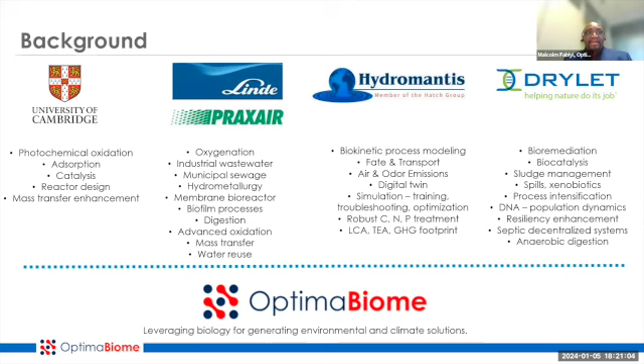And for the last year, I've been running my own startup called OptimaBiome, and what we do in OptimaBiome is basically just leverage biology for bringing environmental and climate solutions. So in all of this time, this is just a selection of some of the types of processes that I've essentially worked with. So a lot of oxidative type processes, a lot of filtration, adsorption type systems, done a lot with oxygen, enhancing mass transfer, trying to improve mass transfer processes.

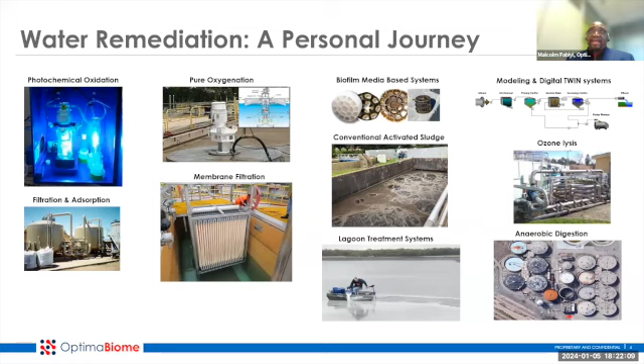We've worked with membrane filtration, with different types of biofilm systems, just to enhance how you intensify biological processes. Conventional aeration, work with ozone, a lot of work with digestion. And as I indicated, one thing that has tied all these different processes together is just the modeling aspects. I think we've come a really long way, and I'll talk more about this in future slides, where we now have a deeper, keener understanding of what is going on in these treatment processes.

So if I jump straight into sewage treatment, the traditional approach we have to treating sewage is almost exactly about 110 years old now. It was developed by 2 gentlemen, Ardern and Lockett, based out of the UK in 1914. And the reality is the process has changed very little from what they did. The major changes that have happened have been around what you do in secondary treatment. So for almost 60 years, from about 1914 till about 1974, at least in the US, the exclusive focus of wastewater treatment was just removing COD.

There are 3 major challenges we have in a wastewater system. We have carbon, we have nitrogen, we have phosphorus. And we spent the first 60, 70 years just focused on removing carbon. If all you want to do is remove carbon, all we need to do very simply is capture it; about 50% of the carbon coming into a wastewater plant is in the form of solids, mostly fecal waste. So if we have grit removal systems that remove sand, if we have primary clarifiers, this is sufficient to remove about 50, 60% of your organic material.

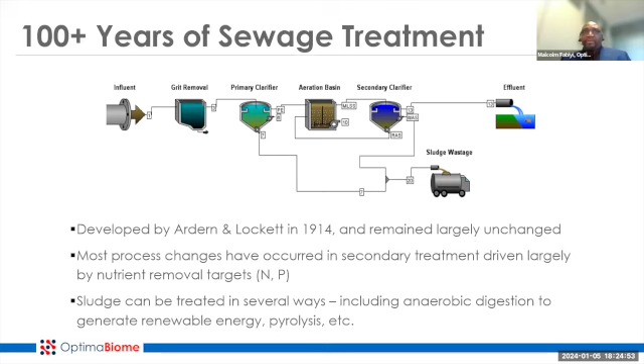What has changed in the last decade or so has been that in the past, we were all prepared to take the sludge and take it to a landfill. Now there's a recognition that locked up in that sludge is organic material, is energy, and why waste energy? Why take it to a landfill and have fugitive methane emissions, leachate result from that when you can actually tap into that energy source?

The other thing that we've learned, and I'm grateful to have been part of this development in the last decade or so, has been that we now have a keener understanding of all the complex elements that go into the wastewater treatment process. As I indicated, I was fortunate to work with Hydromantis, leading their activities in the US. The CEO of Hydromantis is a gentleman who is actually now visiting family in India called Dr. Rajiv Goel. And we have a keener understanding of the biokinetics that governs how microbes behave.

We understand now that the thousands and thousands of microbes in a wastewater treatment process each have their own unique biokinetic rates. Some of them double every 2 hours, some of them double every 2 days. Somehow you have to find a way to balance those complexities. In some places, we're precipitating material. Sometimes we're using different chemicals. We're moving water. We're moving water that has solids.

We're moving water that has biological solids that have a density that's close to that of water. But at the same time, that water, as it moves through a sewer, might actually also be moving sand and grit materials. And as you're moving through the process, some things are settling out. Sometimes you're forming new solids. It's a complex system.

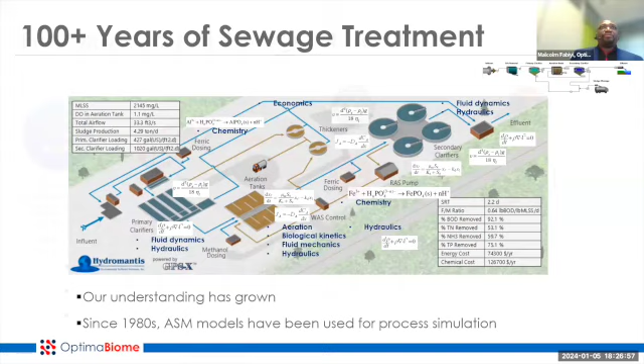But thankfully, we have been able to develop tools that allow us to handle that complexity, so that whether we're dealing with a plant that treats 1 billion gallons a day, like we have in the city of Chicago, or whether we're dealing with a small decentralized system that's supporting a school that has 400 people, there are now tools that we can use to design those systems, to understand precisely what they can do, how it can be done, what the footprint would be, and essentially what would be needed to get it done.

So now to the fundamentals. At the end of the day, all we're trying to do in wastewater treatment from a biological perspective is take organic material that has carbon and leverage the metabolism of microbes. Exposed to a carbon source, microbes are going to consume that carbon source. That treatment is either going to happen aerobically or anaerobically. If it happens aerobically, our end products would likely have a significant amount of CO2, and we will always form some excess sludge.

If it happens anaerobically, our main output will have methane. There will also be a little bit of CO2, and we will also have some sludge, but less sludge, because the anaerobic process is energetically less efficient, which is an advantage for us because that generates less sludge. At the end of the day, that sludge would have to be treated, so the less sludge we have, the better. Anaerobic processes in general tend to provide a lower yield relative to the amount of COD, the chemical oxygen demand, that is reduced.

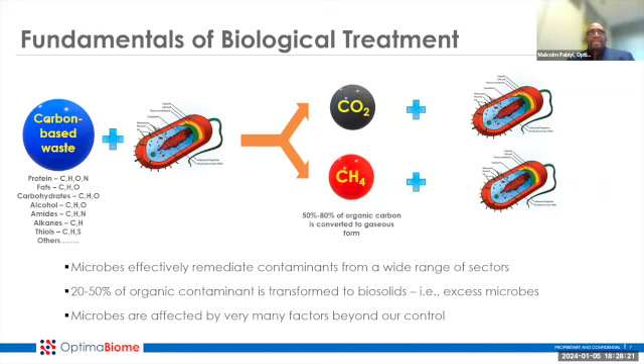So we know microbes are effective. We know they're extremely effective. We know they can remediate a broad range of contaminants. And if you look at the pros and cons of the process, the main advantage of the biological approach is we're leveraging nature. Microbes were here on Earth long before humans came here. They have learned to metabolize most things. There's practically nothing that microbes can't deal with.

The only challenges we're facing now are some new molecules we've created. So things like PFAS are a little difficult for microbes to deal with because they're new molecules. We're just starting to find microbes that can metabolize some of those materials. We're finding it a little difficult to have microbes that can metabolize things like artificial sugars, for example, in wastewater treatment systems, because these are new. They're new challenges to microbes.

But interestingly, we're also starting to find that there are microbes that have started to adapt. When you look at some wastewater plants, and I did this work in the last 5 to 10 years, we were seeing things like aspartame and some of these new sugar molecules, sucralose, just going through the process almost completely untouched. But now we're starting to see microbes adapt to them. So microbes are remarkably adaptable.

So the beauty of the process is it's cost effective, it's robust, it's flexible. In any wastewater treatment plant, and we do a lot of genomics, there's thousands of bacteria. If one fails, there's another that's going to take over and get the work done. And then obviously it's publicly accepted. The disadvantage, though, is that not everything is biodegradable or readily biodegradable.

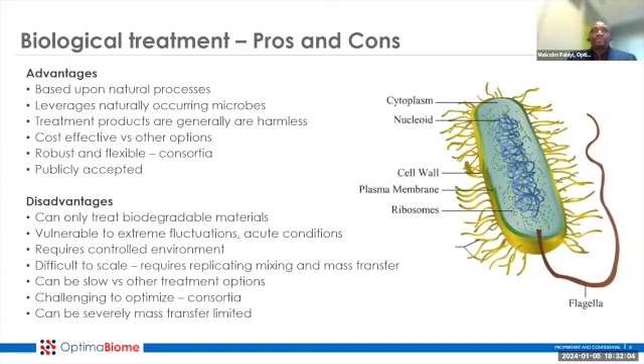So a remarkable process, but there are also some issues we have to deal with. And then just the dizzying array of microbes and functions that we require. If we think about just sewage, what's coming from somebody's home, the challenges we face are immense. So we have carbon. In order to degrade carbon, we need things like traditional heterotrophic biomass. We need facultative organisms. A lot of organisms are facultative, especially a lot of the organisms in the human digestive system. About half of fecal matter is microbes.

Those microbes are mostly anaerobic inside of the human body, but they're facultative. So exposed to an oxygen-rich environment, those microbes can also metabolize. But in order to just treat what's coming out of a human's body, we need facultative and heterotrophic organisms to do COD removal. We need fermenting microbes to help us break down some of those large molecules and help hydrolyze them. We need methanogens to take the products of that hydrolysis that have been turned into volatile fatty acids and convert that into methane.

We need nitrifiers to take the organic nitrogen, which is in a bound form, and convert that into nitrates, because the only way nitrogen is treated is to convert it to a gas. That's the only way we can treat nitrogen. So how do you do that without some type of nitrification that converts organic nitrogen and ammonia into nitrates? And then we have other microbes, a lot of them heterotrophic, that are able to take those nitrates and degrade them, and basically use the oxygen from those nitrates in terms of reduction.

So if what I need are nitrifiers, then maybe I don't need to build bigger basins to get the nitrifiers. Maybe I just go back here and find some nitrifiers in nature, cultivate them someplace else, and then bring them into the process. Maybe what I need are halophiles; I probably don't need to expose my entire system to halophiles. I can see whatever hand nature has dealt me in my process, optimize it as best as possible, and then go find halophiles and bring those halophiles into the system. So

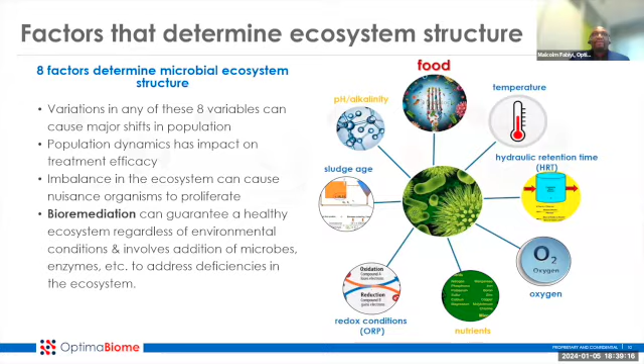it leads us to the other challenge that I've also been focused on in the last decade, which is if we're trying to optimize a wastewater treatment system without building more tanks, without increasing sludge age, and we're going out to bring microbes that are not natural or native to the system through bioremediation, what it means is that we are trying to introduce into that process microbes that natural selection does not prefer. Because if the natural tendency was for those microbes to grow, we would not need to bioremediate. They would already be in the system. We would have optimized for them.

So anytime we're doing bioremediation, it means we're trying to introduce into a system microbes that nature has not selected for, and it poses 4 problems. The first problem is that any microbial system we go into has acclimated microbes. It has the bacteria themselves, it has viruses, phages, that are native to the system that the microbes must be adapted to. And then it has other organisms. So the first problem we have is if we introduce these new microbes, one possibility is they get killed by things that are smaller than them, by viruses.

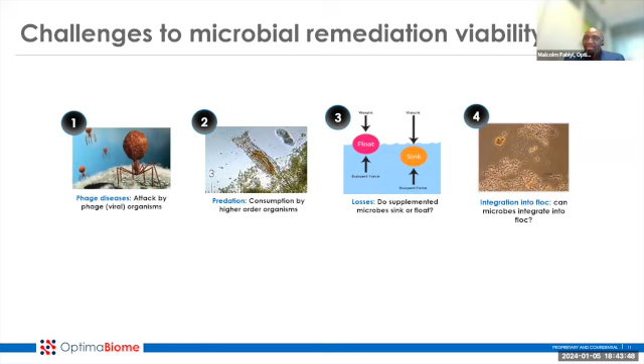And then the fourth one is, how do I make sure that when I introduce these microbes that are supposed to enhance the system, we can get them integrated into floc within the time frame that we have for the hydraulic retention time? So this led me to my work in Drylet, and what Drylet did was, rather than just dose microbes directly into a wastewater treatment system for remediation, they would actually embed the microbes inside a porous media. So the porous media would be some type of metallic oxide, highly adsorptive, and normally food-grade material, so things like silica oxide. And the microbes would be embedded.

And the advantage that provided was, by protecting the microbes inside the media, you are protecting them from things like phages and predation organisms. So these media are typically 100 to 600 microns in size, so much bigger than some of the things that want to feed on the microbes. That protects them. The other thing is, because the microbes are inside of the media in this biofilm environment, they're very resilient. I think the best example of biofilm resiliency I can imagine is the fact that we brush our teeth every day, and yet we can't kill the microbes that are in our mouth, because they are in a biofilm form. And the biofilm form also offers remarkable advantages.

Now we know there's something called quorum sensing. Now we know that there's lateral gene transfer within a biofilm environment. Now we are beginning to understand why all it takes in a biofilm is for one or a few microbes to survive and adapt, and then pass those characteristics and qualities across the entire biofilm environment. So that provides that type of protection.

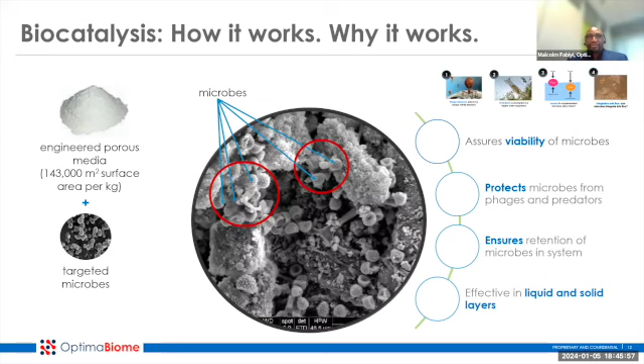And then the other one is, this metallic oxide doesn't float. If you have good mixing, it stays mixed. If the mixing is poor, it falls into the solid phase. So you retain these microbes in this form for the sludge age, for the solids retention time, and not the hydraulic retention time, which allows you to keep the microbes within the system for much longer. And now that the microbes are within the solid phase for much longer, you're able to integrate much better into floc.

So as I indicated earlier, there are a number of different things to consider when we're looking at microbes. There's a dizzying array of them. There's so many of them we could potentially be bringing in, but there are just so many conditions we have to think about. So the first one is the pH. Depending on the conditions that we're dealing with, what types of microbes are best optimized for the type of work that we're trying to do. Temperature is also critical. And so in the most resilient systems that I've seen, you would see microbes across a broad range of temperatures.

And as you can see from some of these diagrams, even though the microbes might have optima, so the mesophiles might have a 39 degrees Celsius optimum, there's a significant overlap at some point between psychrophiles and mesophiles. So we're typically not surprised when we do genomic analysis and we find psychrophiles even in mesophilic systems, because there is some overlap. It provides us with resiliency. It's one of the reasons why winter comes and our entire system doesn't die off, because as soon as winter comes, it just means that our population dynamics begin to shift a little bit. And with a keen knowledge of what's going on in the system, we can then begin to use things like bioremediation and process modeling to help us optimize what's going on in the system.

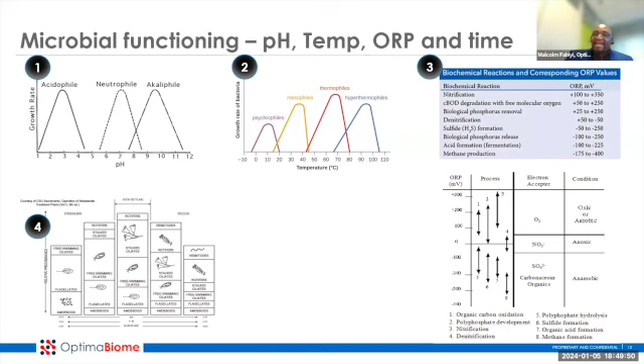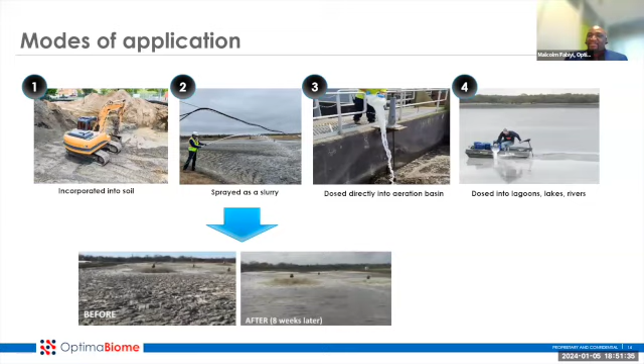Sometimes we dose directly into the basin. We do a lot of work with lagoons, lakes, rivers, streams, septic systems, home-based septic systems, wherever microbes are being utilized. One of the things that I've learned is, as soon as we understand what's going on in that system, without engineering anything else, there's a possibility that we can get treatment enhanced. So there's a broad range of things that bioremediation could be applied for.

One of the other interesting applications is remediating algae. Anytime we see algae, it's a competition for nutrients: nitrogen and phosphorus. The good news for algae is they don't need organic carbon. As long as there's inorganic carbon, alkalinity and CO2, the algae will grow. So if you're trying to knock algae out, either you make sure there's no nitrogen and phosphorus, which can be very difficult,

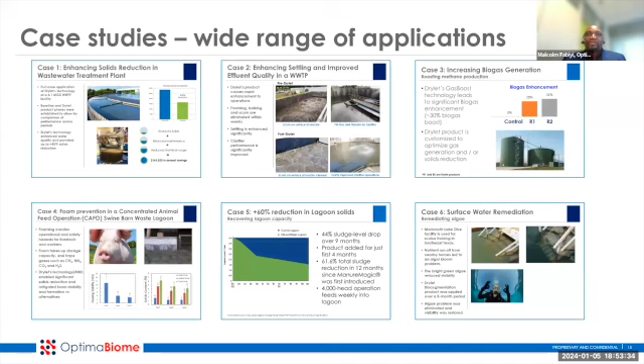And the strategy here was to go in and outcompete the algae by introducing microbes that could compete for the nitrogen and phosphorus within the system. So one of the things that I've seen happen a lot more, certainly in the last decade, is when we think about bioremediation, when it comes to bioaugmentation, the work that I've done has mostly been focused on natural cellular bioaugmentation.

So we've gone back into nature. We've looked at microbes that are naturally in water and in soil, and then we've taken those microbes that we know have some specific functions, and we've incorporated them into things like that metallic oxide platform, put them into systems. But what we're starting to see now is a lot of genetic bioaugmentation. We're seeing companies like Allonnia and LanzaTech and Ginkgo Bioworks actually look at molecules they want to treat and then engineer microbes that can treat those systems.

I have a bias for natural systems. I think there's a limitation. I am always wary of introducing new things into the natural environment. But this is just an area of more work that I'm starting to see happen now.

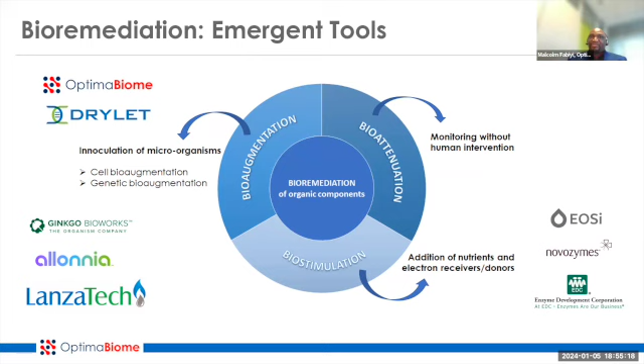And then what I'm seeing a lot more, and I'm also starting to do some work in this space, is a lot of my focus historically had been on using microbes and having those microbes actually generate the enzymes that you need. But then there are companies that actually isolate enzymes. And you can also, in the same way that you're introducing the microbes, introduce some of these enzymic elements into processes to enhance treatment. So it brings me to 2 slides that will end this discussion.

So the first one is rethinking water treatment. If we think about sewage, the strange thing about sewage is the average human being excretes about 0.03 gallons of feces a day. We also generate somewhere between 0.5 to 1 gallon of urine. These are the major sources of waste at a household level. So in the United States, the average sewage generated per person is about 100 gallons of sewage per day.

And what we're basically doing is we're taking 1 combined gallon of waste from urine and feces, and then we're diluting that with 99 gallons of what is arguably almost clean water from flush, from wash waters, and that's what we're sending to these big treatment plants. So if I was going to rethink how to do sewage treatment, and we've done that because that's just the way we've always done it. So we use anywhere between 1 to 4 gallons per flush.

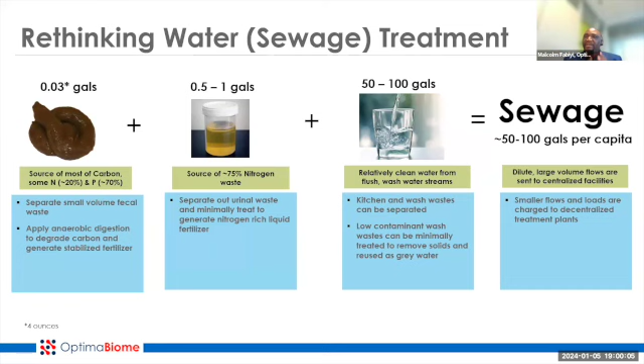I've actually been fortunate to be involved in a number of projects almost 20 years ago now in Brazil, where we were providing these types of services to high-rise buildings, where we were taking their wastewater, treating it in the basement using membrane bioreactors, and then taking the water generated from that, and that was what was used in their flush systems. So they didn't use clean water to flush, they used this recycled water from their own treatment systems for flush water. So that's one way to think about it.

The other fundamental paradigm shift that I think we also need to consider is: should we even be talking about waste treatment? I argue that our wastewater treatment plants should be biorefineries, right? We started with treatment. The goal initially was just let's clean the water. And then there was this move in the 1990s to the early 2000s that was focused around, we know there's a water energy nexus.

We know that somewhere between 2 to 4% of all the energy used in a municipality is for just pumping water. You pump the water to a wastewater treatment plant. You pump the water from a drinking water treatment plant. We're just pumping all this stuff, and it's almost 4% of all the energy we utilize. Do we need to do that? Can we rethink the way that we do it?

And then we have all this richness in waste that we're struggling to deal with. But the reality is it's immensely rich. We complain that we don't have enough phosphorus in the world, but there's enough phosphorus locked up in our feces that we may not need to actually mine new phosphorus ever. We have enough gold falling in the feces that if we had ways of being able to extract those materials, there's so much that we could mine from sewage.

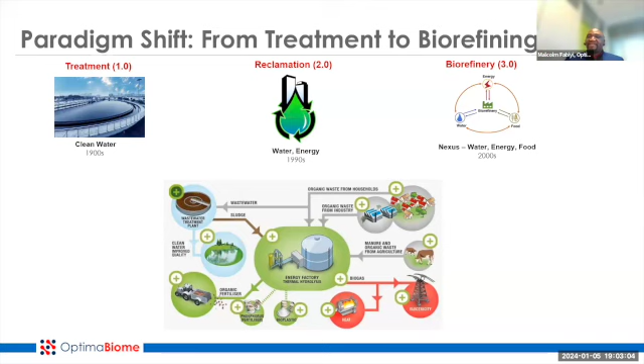Could we take the CO2 that is generated from the treatment processes and then leverage that CO2 and utilize it in methanotrophic or methylotrophic systems that can take CO2 and methane and turn that into bioplastics. These are possibilities that can actually be explored. And so right now I'm spending a lot of my time trying to explore those possibilities.

And I think there are 6 challenges that we need to address as we think about this new age possibility. The first one, the biggest challenge we have, is these biosolids: they are rich, they are nutrient rich, they are carbon rich, but they are not soluble. So how do we access that carbon? We need to lyse the cells. We need to blow the cells open.

We need to get into the COD that's locked up in these cells, in this cellulosic or lignocellulosic material, in the biosolids. How do we access that? We need new lysis methods to be able to do that. How do we enhance the cost and the efficiency of digestion? We use about 20 to 30 days to do digestion.

It's inefficient. And after doing digestion for 20 to 30 days, you're lucky if you have actual 50% conversion of the carbon locked in the digester, because it can be a very difficult process. The solid concentrations are so high that there's significant mass transfer limitations. So how do we boost that process? That's also something that we need to unlock.

We have all these possibilities to utilize algae for CO2 capture. Struvite right now, anybody who runs digesters, it's a nuisance. We're generating all this struvite, but this stuff is actually rich in nitrogen and phosphorus. How do we optimize those systems so that these nuisance materials that are now impediments to efficiency can actually become products that we generate? How do we do things like methanotrophy?

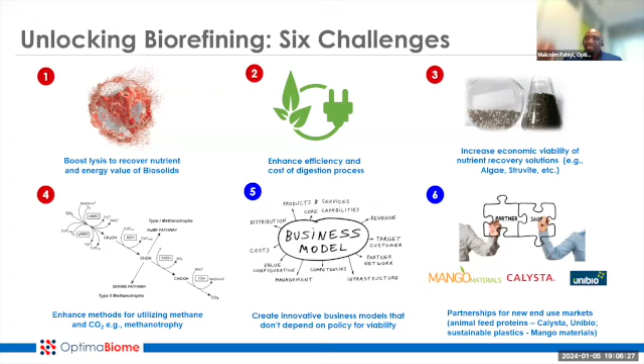In conclusion, what I've learned in my 2+ decades in this industry is that biology is remarkably efficient and cost effective. And that if we understand biology and we understand microbes and we understand the limitations of these treatment systems and don't try to force them to do more than they're supposed to do by engineering them to be even bigger and more monstrous, that just understanding that simple biology can help us be much more efficient, can help us understand what we can't change, and then leverage what we have to be able to address the goals and the targets that we want.

I've also learned we need new tools. Genomics is something, when I started in the business, 20, 30 years ago, we weren't using DNA analysis. We didn't even talk about the differences in the types of microbes. Now it's routine. There's no plant I would go to today where one of the first things I'm doing is not a genomic analysis to really understand what microbes are present and to understand why we're seeing the type of things that we're seeing.

And then the last 2 things I would close with is the fact that I come from Nigeria. It's a developing economy. India is also developing. And as we continue to build new treatment systems, I think we have the advantage of leapfrogging some of the things that the developed world, that folks like the US and others did. They started doing carbon removal and then found out over time that they needed to do things like nutrient removal. And so their plants evolved to deal with that.

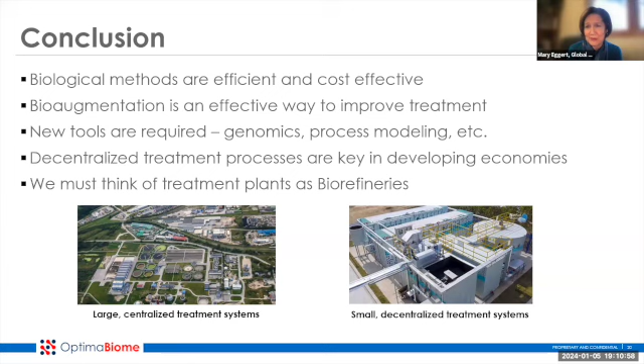And Malcolm, it's 100 years of history, innovation that's needed. So very thorough presentation. And we thank you for taking the time, and also the beautiful case studies which prove out what was there. So Ravalji.